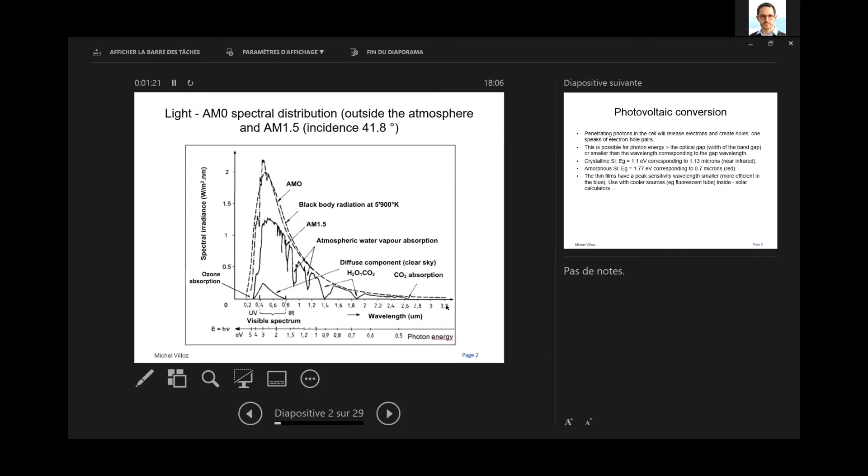The PV conversion is photons that can come inside a material, and we use most of the time silicon. Each photon can, with change, release electrons and create holes. So we speak of electron-hole pairs. That means that the electron will go from the valence band to the conduction band and be available to carry current.

In crystalline silicon, we need an energy higher than 1.1 electron volt, which corresponds to 1.13 microns, so in the close infrared. In amorphous silicon, it is a bit higher, with 1.77 electron volts, which is related to 0.7 microns wavelength, in the red. It's the main reason why we were using amorphous cells to power devices inside rooms, because they have a better efficiency in the blue, and artificial lights most of the time don't have much red part in their spectrum.

If we use silicon, and photons come inside the crystal, they will change the resistivity. If we want to do something active, we have to push them. To push them, we will dope the crystal, adding foreign materials to polarize it and create an electrical field.

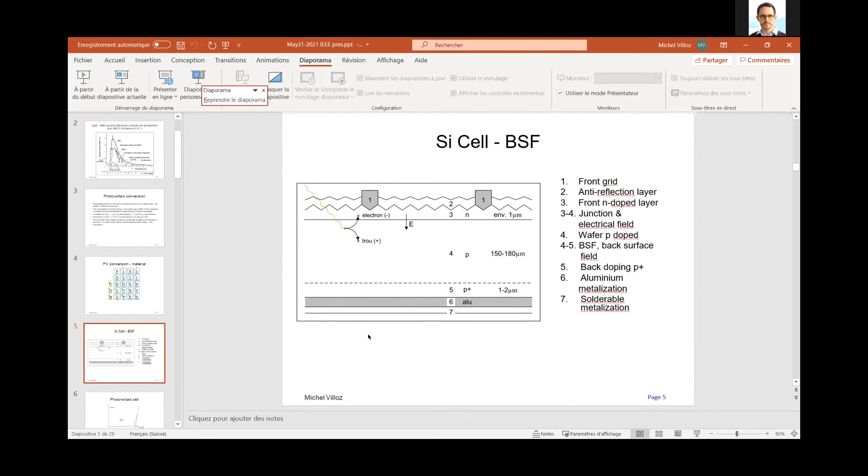A typical module is made of, in this example an old module, 36 cells, enough voltage to charge a 12-volt battery. This has been made for decades. The typical 50-watt module had an efficiency between 12 and 13%.

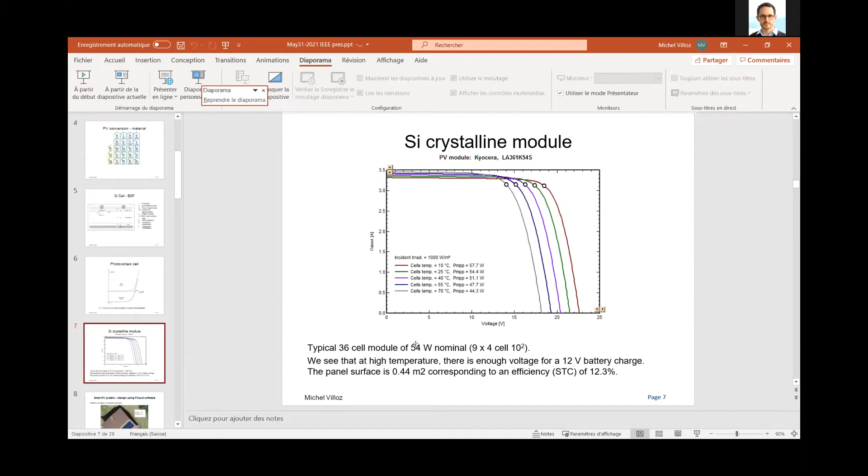If we want to design a system, we will use software to calculate how much energy we could produce. I take a small example in the Swiss Alps, just to show you the importance of the environment. When we have mountains, it's always interesting to see what we can do and how much we lose because of shading from the mountain. So I took an example in Le Sépey, in the Vaudoise Alps.

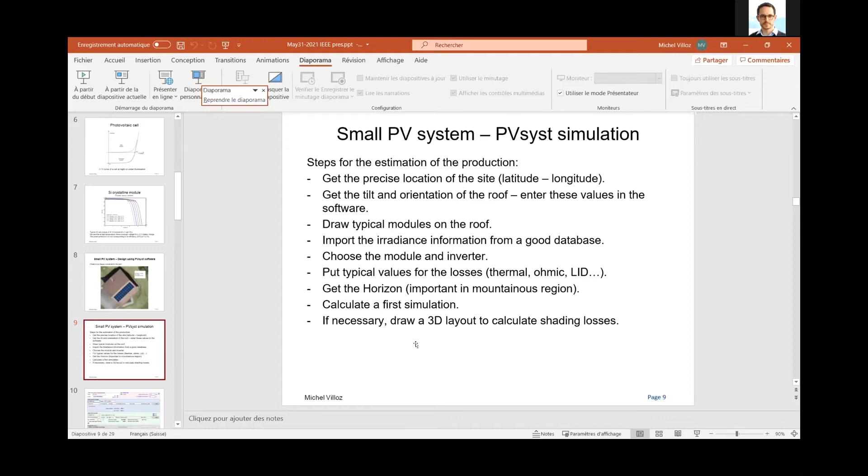If you do a simulation, you have to know the location, then the tilt and orientation of the roof. You will draw how many modules you can put on that roof. You import your irradiance from a good database. You choose a module and an inverter, and you put typical values for losses. Then you get the horizon, especially in Switzerland almost always, and you calculate the simulation. If necessary, you can draw a 3D layout to calculate shading losses and local losses.

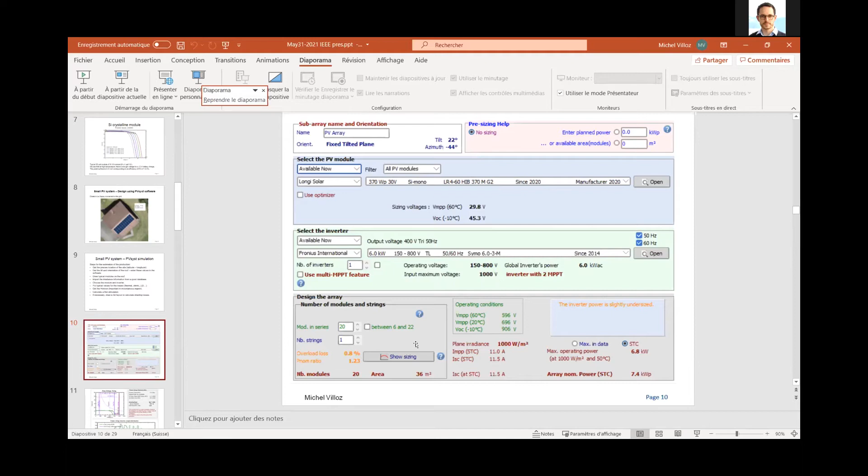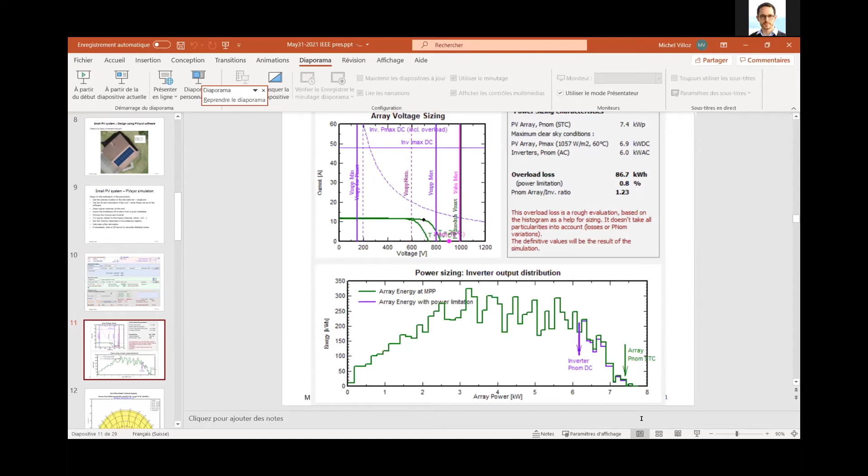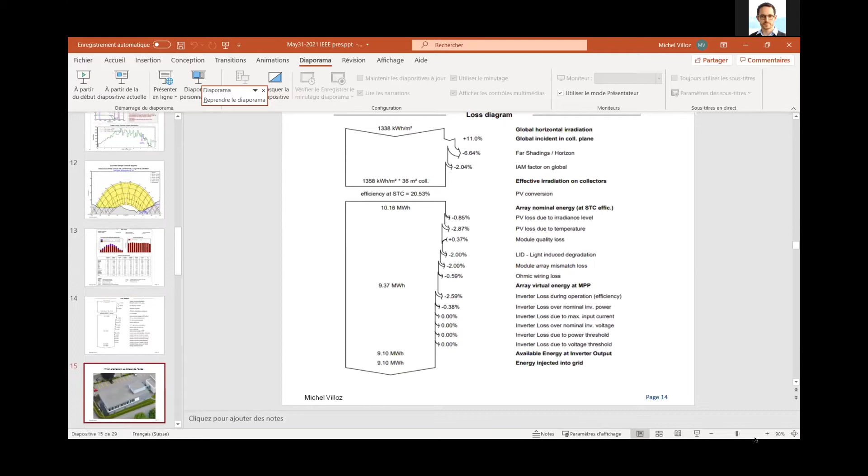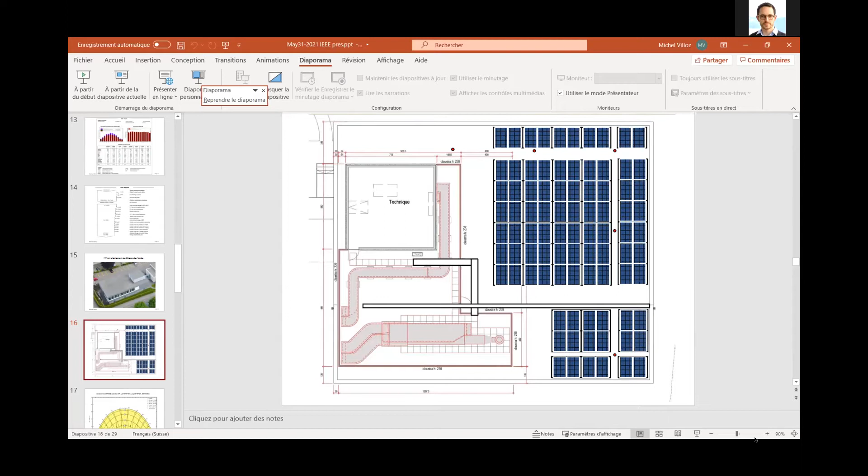It's interesting to put a peak power with cheap modules, especially in Switzerland, where the labor cost is high. It's better to put the maximum number of modules for a certain project.

Here again, I have the horizon. The choice of components: I'm using a module that was available last year, we did this at the end of last year. JA Solar, it's also a big manufacturer from China.

And then ABB, it's an inverter produced in Italy. Since this, they have sold the company to another group called FIMER. So ABB is not anymore the owner of that company.

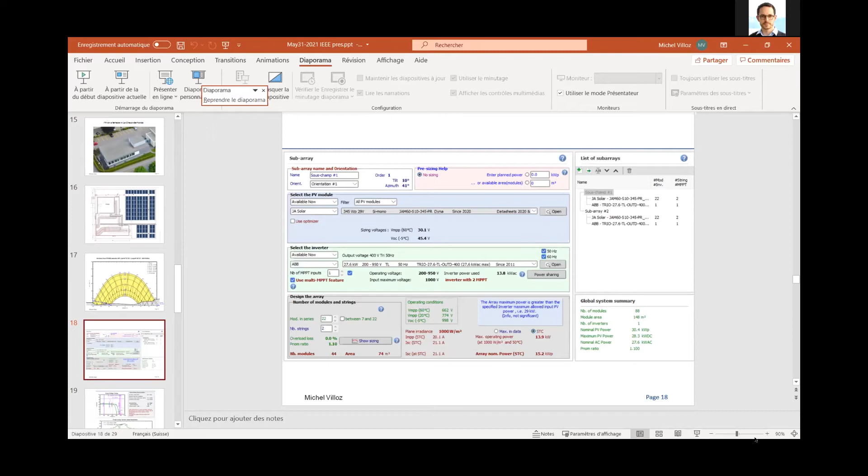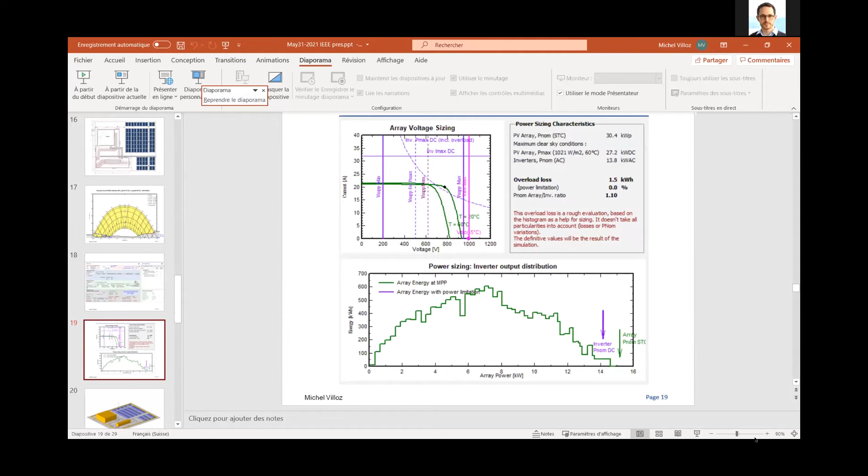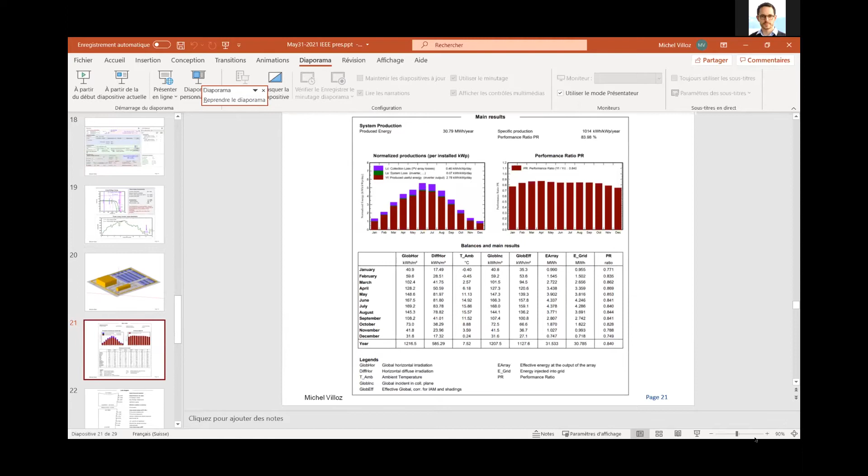Inside the program, we do a 3D design to be able to calculate the shading losses. And when we do the system, again we have all the curves and production, and again the losses.

What is new here is that the first gain coming from the tilt and azimuth is negative, because in the dome we have only 10 degrees of tilt, and we don't have all the modules looking south. Far shading is less of a problem than in the Alps. Then the near shadings are a loss because of obstacles of the building very close to the field.

And IAM again on this module is not so good. Then we have an extra shading loss, which is shading's electrical loss. This comes from the series connection of modules.

So maybe you have heard that on a module you can put optimizers. That means you can change something in the module to have a DC-DC connection just for each module. In that case, we could reduce this electrical loss here. We can win 30-40% easily. But it means you add sophisticated electronic equipment on each module.

If you think we have the temperature between, can be minus, slightly minus. In La Chaux-de-Fonds, we can have -10 for the module in winter, and in summer we can go to 60 degrees. So if you think you can put sophisticated electronics at those temperatures for 30 years without problems, you might choose it, besides the fact that it is expensive.

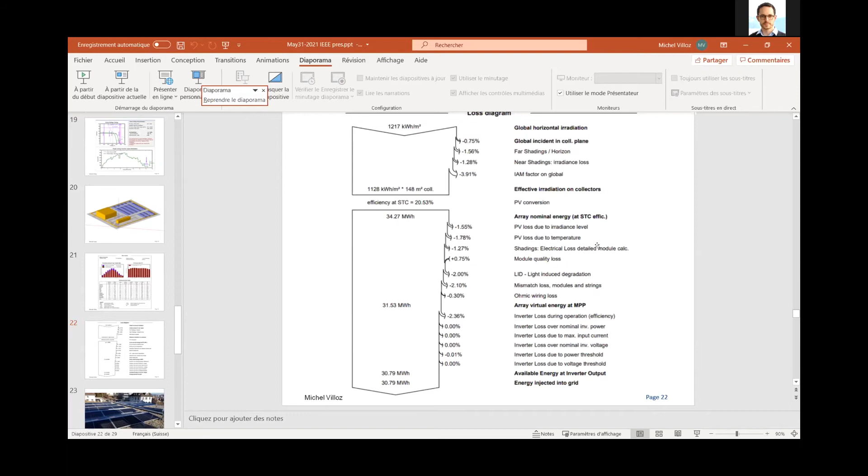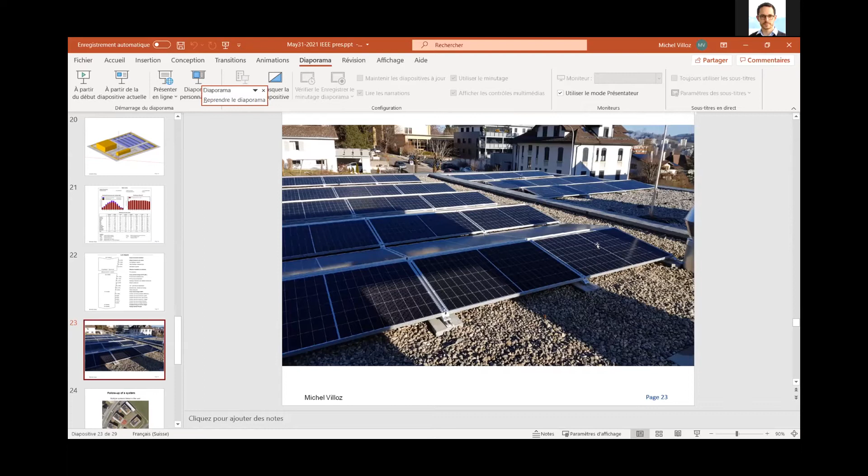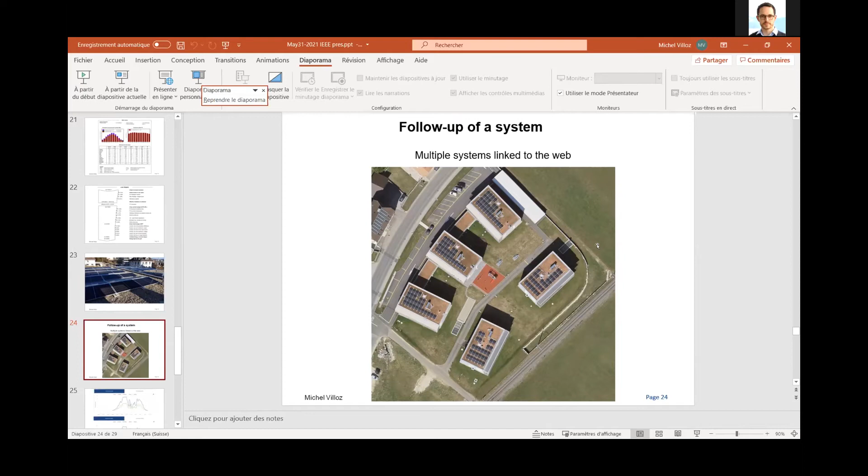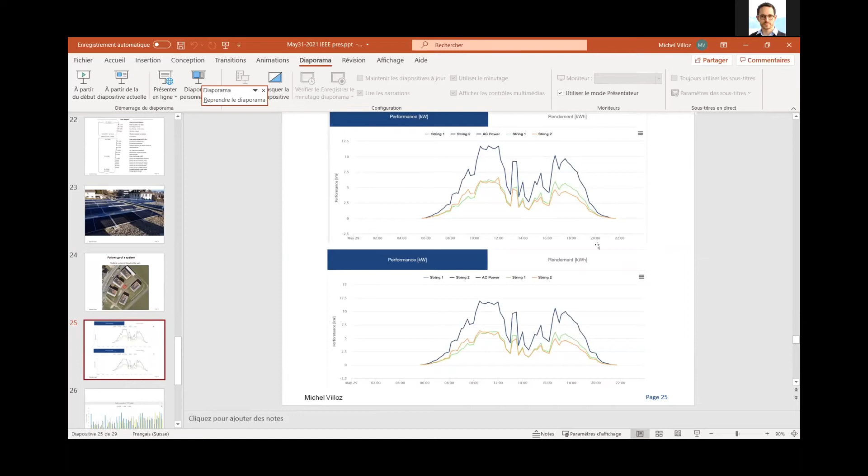And we can also look overall with many years. Here I have an example with 3 years, and we see that at the end of this month we have good results. And the last value, May 30, was fantastic, no clouds at all. So it's a very good day, the best day of May. But in 2019, May was much better in this example.

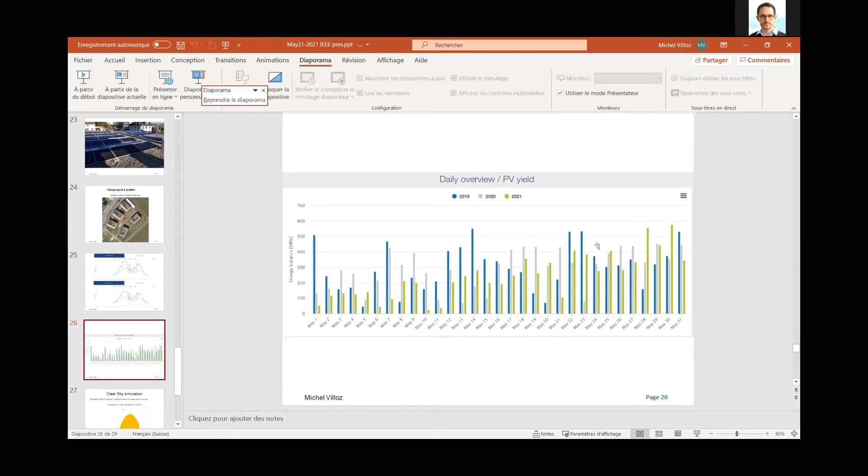What can we do when we have a simulator? We can also, on small systems, we will not put instruments, it's too expensive. So if you have a personal system, you could say, okay, how can I control that my system is not aging? So one way is to do what we call a clear sky simulation. So we decide to make a simulation with days like that. This is yesterday - last Sunday was bright, no clouds, and you get this kind of curve.

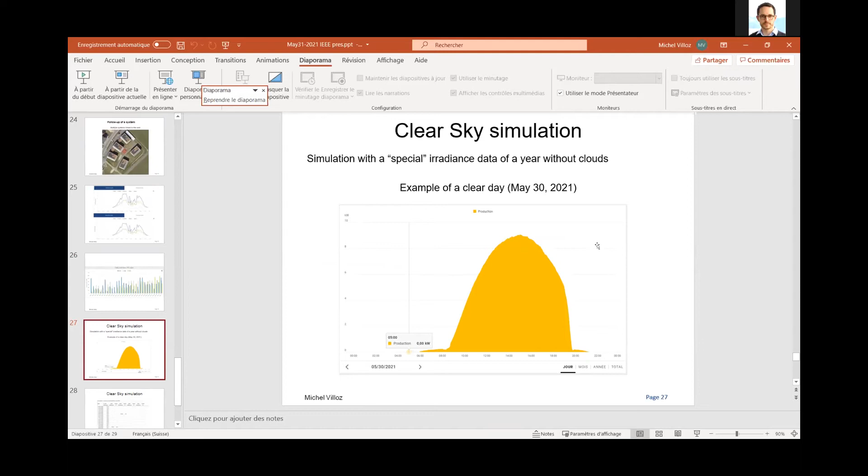It is not exactly symmetrical because my system looks in the direction of west. You see, it's a bit on the angle because of this orientation. So the azimuth is west in this example. And if I do a simulation with this light for the whole year...

I can compare different years in the same month, for example. So here I have an example, 2018, 19, 20, and 21 in May, and I take the best of this period just to see if my system is aging. So in this example, I have 8% difference in 2018, then 8.9, then 9.1, then 8.9. So I can say from this that I don't have any real aging of the system.

I have an example, the same kind of system, but we're not using this. I have a system near Fribourg, which has normal - I have 15 years of production, and the best year was last year.

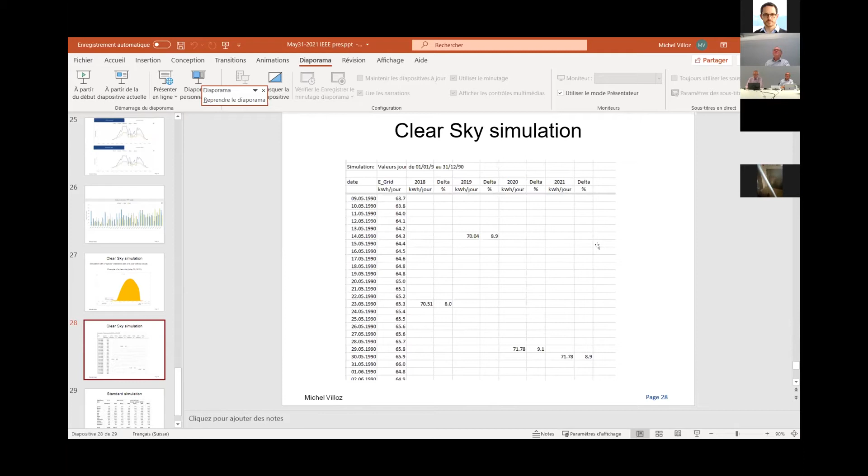2020 was fantastic, and not just in Switzerland, because people were at home. There was more sun last year than in any of the last 15 years. So if we have a normal, standard simulation, I can compare years. I took the same small system here for 2018, 19, 20. But with this, I cannot see if my system is aging because the climate is changing. It's just to see, okay, my system still works. In this particular example, the best year is 2020, but I already knew that.

But I think it's about clear sky conditions. I have used this for expertise, to tell people they should clean their panels, because at a distance, if you have access to daily values, you can produce this kind of analysis.

I had a big system, more than 5,000 modules on a big roof in Valais. They were just asking, should we clean? In 3 years, they had lost 15%. But we didn't know - they had put sensors but never cleaned them. It's a bit of a ridiculous situation. With clear sky data, I was able to see: when the system is brand new, I have a certain value between my simulation and the clear sky reference. Then one year after, and so on. I had roughly 5% loss per year. This was also with modules at a 10 degree tilt. So even in Switzerland, if you don't have a strong tilt, it makes sense to clean.

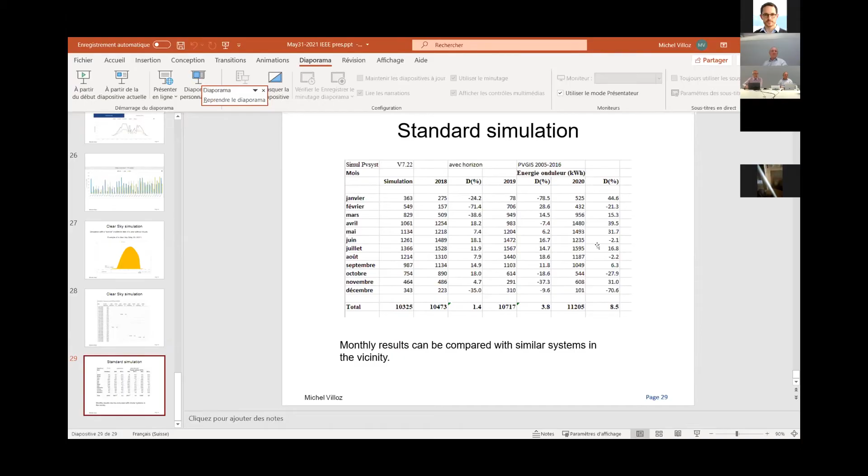Okay, if not, I'll give my connection to Professor Ballif. Okay, you can listen. Okay, fantastic. And you can see my screen as well. Yes, we see you. Okay, perfect, we see you.

So it will be a pleasure in the next half hour to go through a journey. We have seen what a PV power plant is, we have seen some energy analysis of this PV power plant, and now we will really try to take a big journey around what happens in this world of photovoltaics.

As a start, I want to remind you that our goal of using solar energy is twofold. First, we would like to create an energy system that is less costly in the future, and we think it's possible to do that in large part thanks to photovoltaics. Second, at a global level, we would like to mitigate global warming, and the question is whether photovoltaics really has this capacity or not. We're going to check some numbers, including with respect to gray energy.

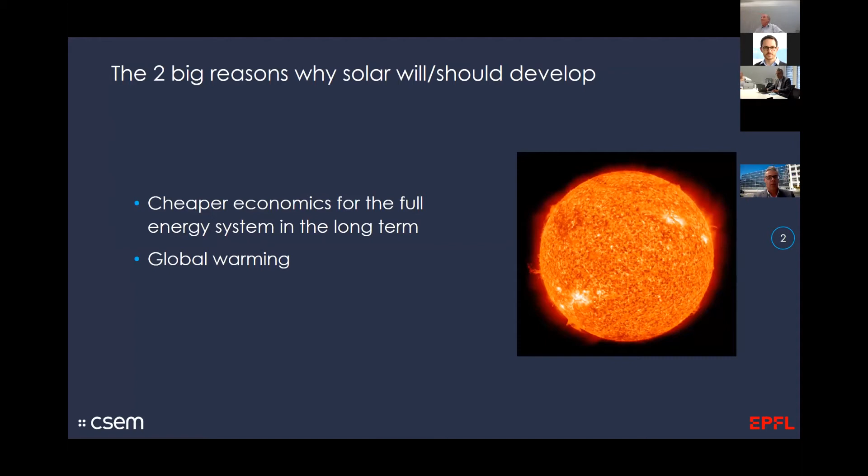First of all, what you need to know is that there's been a huge increase in production capacity, accompanied by a strong decrease in the price of photovoltaic modules. We roughly sell modules according to a unit called the watt, which is the maximum power given under one sun. This watt has come down very much in terms of pricing. At the beginning of the year it was something like 20 to 22 cents per watt. Now it has gone up again a little because there's too much demand for photovoltaics and some shortage in the refinery of polysilicon. But this price will continue to go down in the long term.

So today we're talking about getting a photovoltaic module for something like around 50 Swiss francs per square meter. This module will produce in Switzerland, over its lifetime, around 6,000 kilowatt hours at least. You can quickly make the calculation in your head, and you'll find that just the module cost in Switzerland, even if you import the module, is less than 1 cent per kilowatt hour of electricity.

It is interesting because you can make the same calculation: should I import photovoltaic modules or should I import oil? When you make the calculation, you find that it is a factor 15 more expensive in terms of energy to import oil than to import a photovoltaic module. So the economics is quite quick in terms of import.

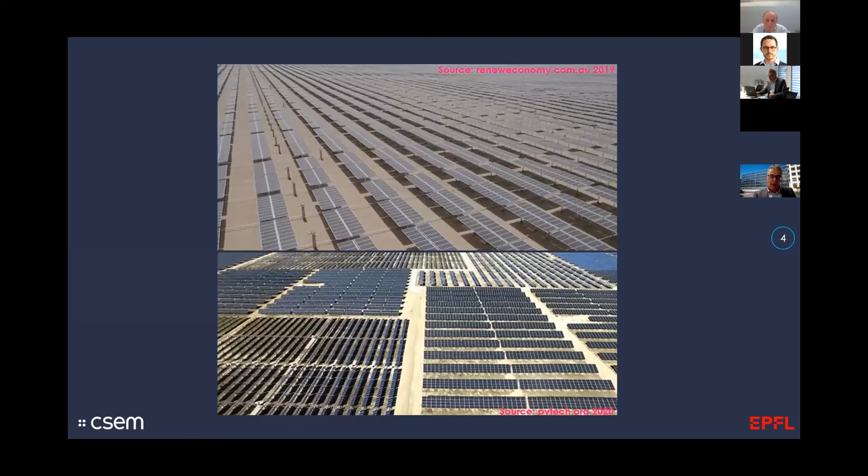If you look at the full system and go to sunny countries, they're starting to build larger and larger power plants. You can see now these very low prices for bids for solar electricity, given in the price range below 2 cents per kilowatt hour, which is quite new because 5 years ago it was not yet the case. It makes photovoltaics really cheap in these sunny countries, and not only cheap, it's a factor 3 cheaper than any other kind of electricity generation - fossil, nuclear, or even a gas power plant. So it has become very cheap, and this opens a lot of perspective.

In Germany, you are at around twice the price, that means more like 4 cents for the large power plant. And in Switzerland, certainly you can also do electricity, depending on the size of your system, between 5 cents and 20 cents if you make a very small rooftop system.

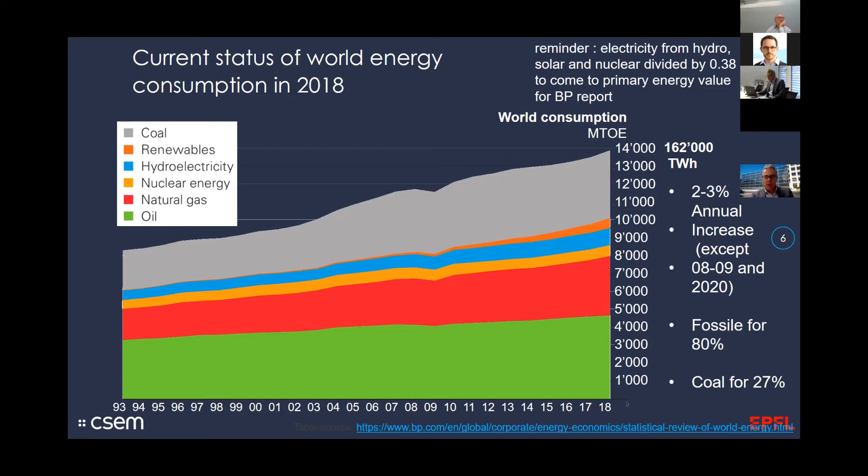If we could use twice less energy because we change our way of living, that would be fantastic. But it's not going to be easy to implement that. And even then, we still need to reduce strongly our fossil fuel energy consumption.

The first question is, technically, would it be possible to really substitute all this fossil fuel? And the answer that you find - I'll give just a few answers here - is that yes, it is possible. You need to consider some large systems to do that. For instance, you can have a look at the study of the group of Breyer, who is replacing in Europe all the electricity from coal and gas and even nuclear with wind and photovoltaics and a small part of biomass.

And this is in a scenario where there is a moderate growth of electricity demand, so it's not yet the full scenario. And they find, very interestingly, that it is possible to balance every hour of the year between solar and wind at the European level.

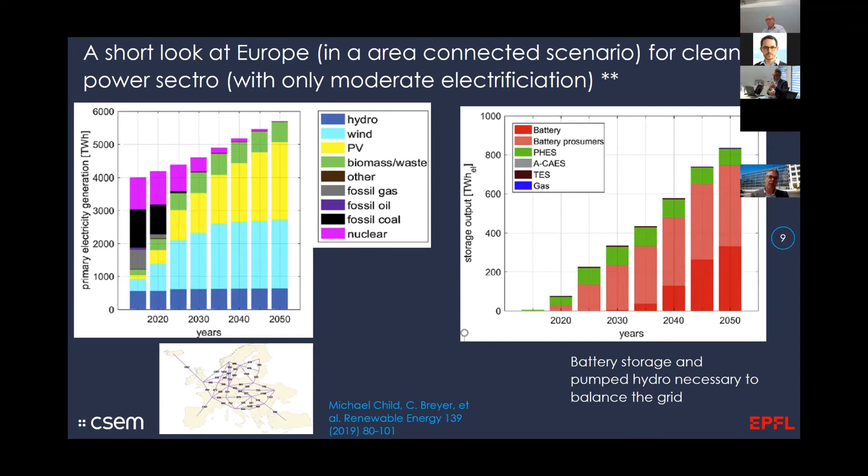They also find that you need either to re-enhance some connections between parts of Europe, or that you need to use a little more storage. But storage here, you don't even need long-term storage, you need mostly short-term storage. This short-term storage will come either from hydro, we already have a big part of it, or it will come from batteries. This can be either prosumers, people who have a battery at home, or it can be the battery of cars, because in all this scenario, most of the cars go from combustion motors to electric, and most of the heating systems go also towards heat pump solutions.

And you can do the same scenario at the world level, and you find two things. First of all, you find that typically you will need to put quite a lot of solar and wind, typically 30 or 40 terawatt, 40,000 gigawatt. So it's quite a lot of solar panels.

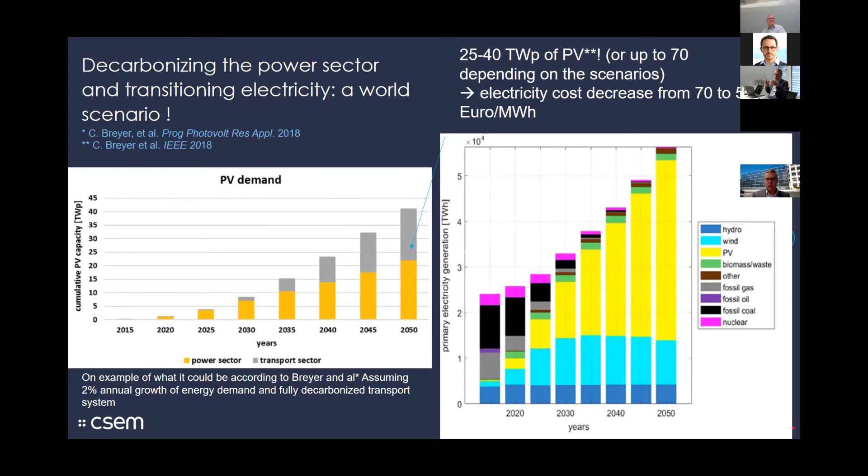But the second thing, even when you make this scenario, is that you find that your electricity, for instance in Europe, would be cheaper than what we have now. So it will be cheaper, it is doable, but of course these are not the same people who are winning and losing. And the question would be, of course, is it also cleaner?

You would need ideally to have also wind in Switzerland. It's good for the winter time. If we have not enough wind, we'll have a deficit more in winter, which we can either compensate by having a few gas power plants, or by importing hydrogen, or by importing electricity. But even in the worst case, we would still be able to decrease our CO2 emissions by up to 86% while still keeping gas for 1 month or 2 months in wintertime.

So anyway, the orders of magnitude are the same everywhere. In the case of Switzerland, it would be between 35 and 50 gigawatt of photovoltaics which we need to install. Today, we have only around 3 gigawatt. So we still need to multiply by a factor, let's say 15, what we have installed in PV in Switzerland.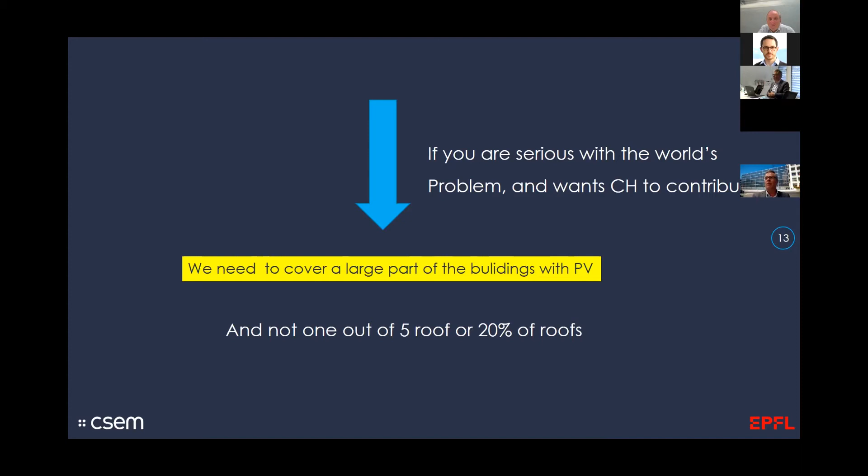But if you are serious in a general way, there are not so many other options than developing massively this renewable energy. And in the case of Switzerland, we should also cover a large fraction of our roofs. People who install a small fraction of the roof are wrong. This is an unsocial and unecological act. You should put as much PV. We need to put as much PV if we want to keep coal and gas out. And I come back to that point.

But you have understood we need a lot of solar. What does it mean practically? It means that we should still increase by a factor of 8 to 10 the annual module production, going towards, say, 1 terawatt or 1.5 terawatt annually. We are around 160 gigawatt for this year. Of course, most of the scenarios you read from many agencies are always wrong and they don't capture the dynamic that could be possible here.

And it's interesting to just evaluate: if I wanted to install enough production capacity to refine silicon, to make the solar cell, to make the solar modules, how much would I need to invest? Well, it's quite easy. You can calculate based on the cost of each equipment from ingot to modules, and you find that you should invest around $18 billion per year over 10 years. You invest that, and that it's nothing.

It's nothing - 18 billion, I can give you a lot of examples. It's $180 billion, and with that you would have all the manufacturing capacity for the PV modules you need worldwide, including refining all the raw materials. So it's not a problem. This is what I call peanuts. Of course, you just need to have the will to do that.

But it also means one thing, and it's very good because I'm working in the field of innovation in solar: there is still a lot of room for developing new things. We need better photovoltaics. We want to improve every aspect of it because it makes the energy transition easier. And of course, we have this technology evolution.

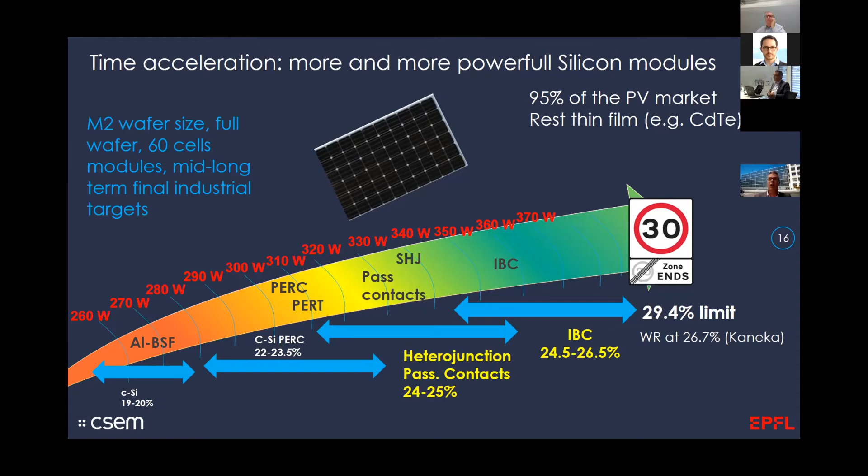The first point is to really analyze this curve, which is the average module efficiency that you can buy on the market - not the best, but the average module efficiency. So the market, to be clear, is 95% crystalline silicon, about 5% is maybe cadmium telluride, and 0.1% are other technologies, but it's mostly crystalline silicon.

What you can see is that there is every year an average improvement of the module of around 0.4%. This means that if you develop something and want to enter the big market in 2025, you should have modules with at least 21 to 22% average efficiency. Otherwise, don't think of entering a mass market. For 2035, this will be 24 to 26%.

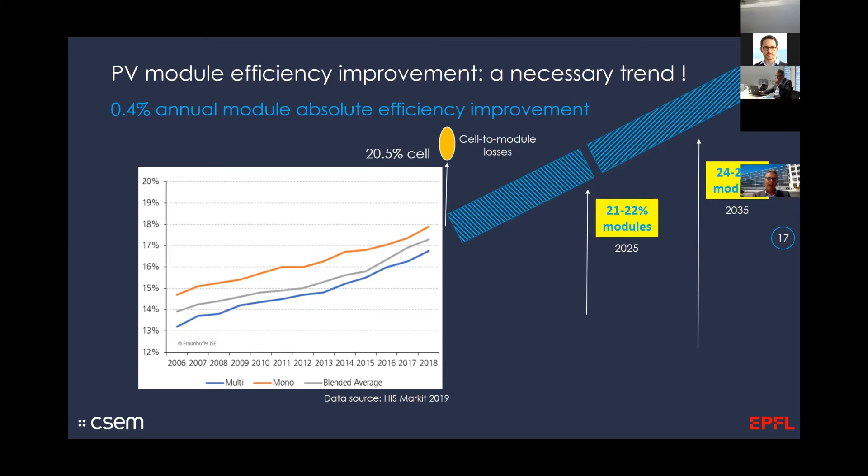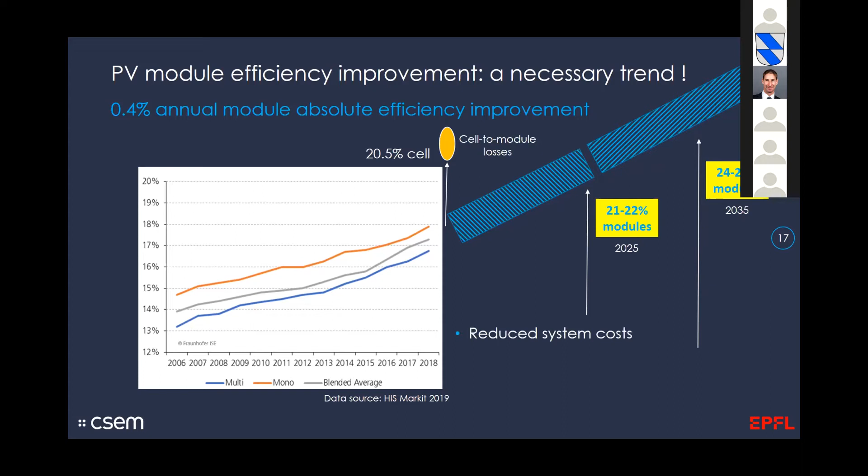What is making this improvement possible? There are two things. One is the continuous improvement of each technology, and the second is massive industrialization. The higher the volume, the more you're able to decrease the cost and improve the technology step by step. And sometimes you have technological changes.

You don't need to remember all these pictures, but this gives you a nice overview of many of the kinds of solar cells on the market - such as the old solar cell, the first one you see on top here, and this new one which is now taking more and more space on the market, called the PERC solar cell.

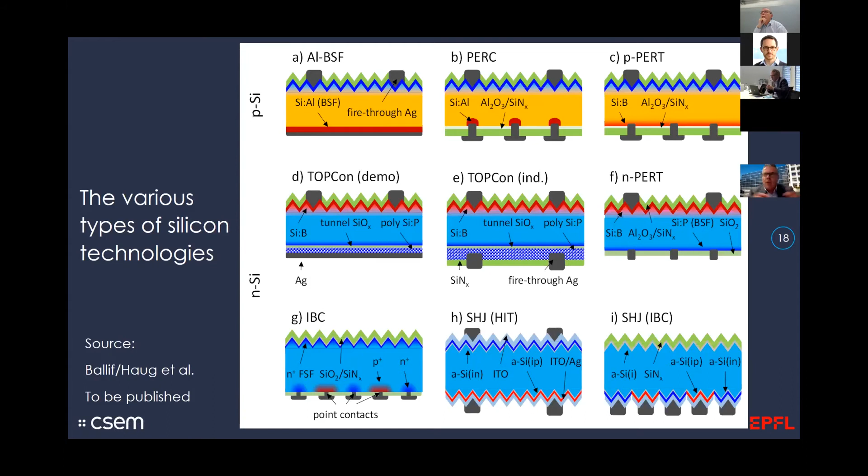And soon you will see more and more TOPCon solar cells, more heterojunction, and sometimes back-contacted solar cells. This technology, such as the aluminum BSF, was here for 10, 15, 20 years, but suddenly the PERC solar cell rushed to enter the market.

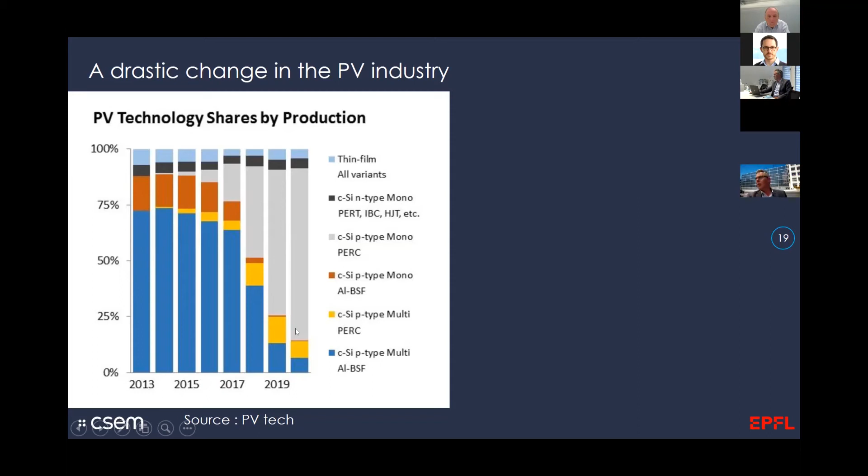In 3 years, the full market has shifted from this blue part, which was mostly multicrystalline or large-grain silicon made with this aluminum back surface field solar cell, to monocrystalline silicon made with PERC technology. It flips very quickly, with some space now available for new kinds of solar cells such as TOPCon, heterojunction, and others that I will shortly describe.

In Neuchâtel, one of the things we've worked very hard on, based on expertise developed in the field of thin-film silicon and started well before I arrived by Professor Arvind Shah, who will speak after me, we've taken the process used for thin-film silicon to deposit, on top of crystalline silicon wafers, a very thin layer of amorphous silicon. This gives you at the same time a fantastic surface passivation with no more recombination of carriers, and, if you add a dopant on both sides, it collects the carriers without any metal touching the silicon.

This kind of solar cell has much higher voltage than other solar cells - 740 millivolts - which means it has a better temperature coefficient, and consequently provides even more energy per watt peak.

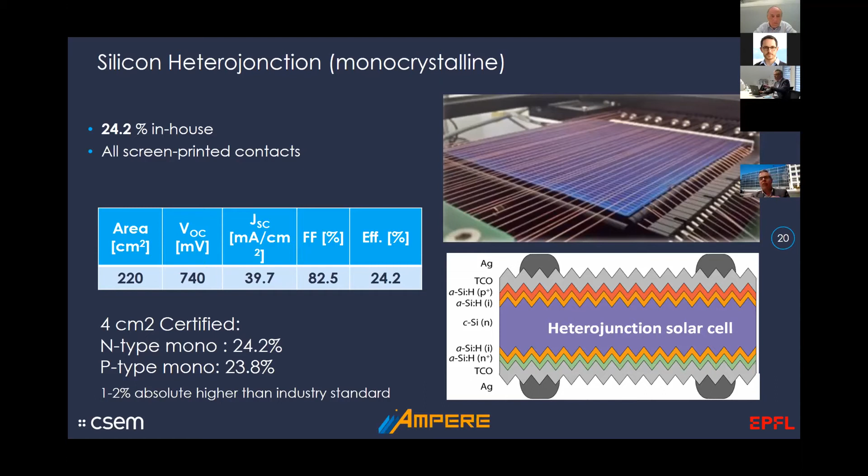At EPFL and CSEM, we can make large solar cells reaching 24.2 up to 24.7%, which is better than the PERC solar cell. Some industry players, who can run many more samples than we can, reach close to 25% in R&D mode and over 24% in production. So heterojunction is one of the technologies we developed, and it has now been marketed and industrialized in many countries in Europe.

We work with the Swiss group Meyer Burger, which installed production lines in Russia, at Enel in Italy, at REC in Singapore. But it was difficult to sell to Chinese companies that wanted only specific sets of equipment. Meyer Burger decided not to sell production lines but to become a module manufacturer. So one year ago, they changed strategy, and now they've just inaugurated new production lines in Germany that should make modules reach close to, but not exactly, 22%, hopefully soon.

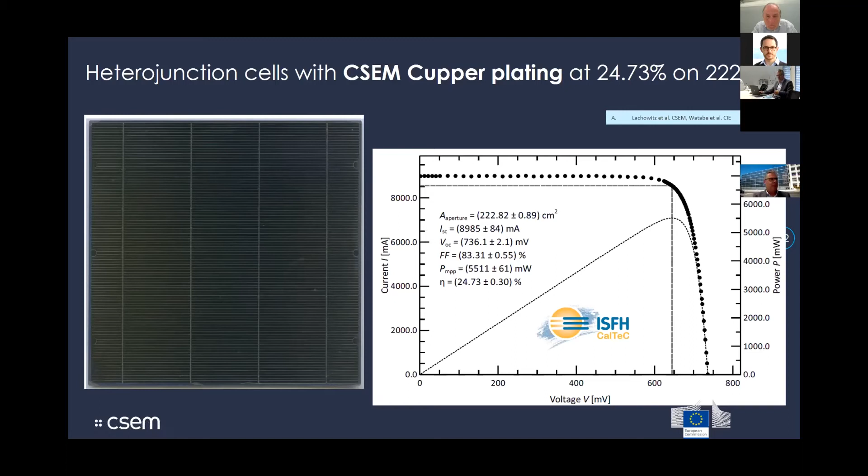And here you can see we could make a large solar cell with close to 24.7%. If you want to go further with silicon, you can do so.

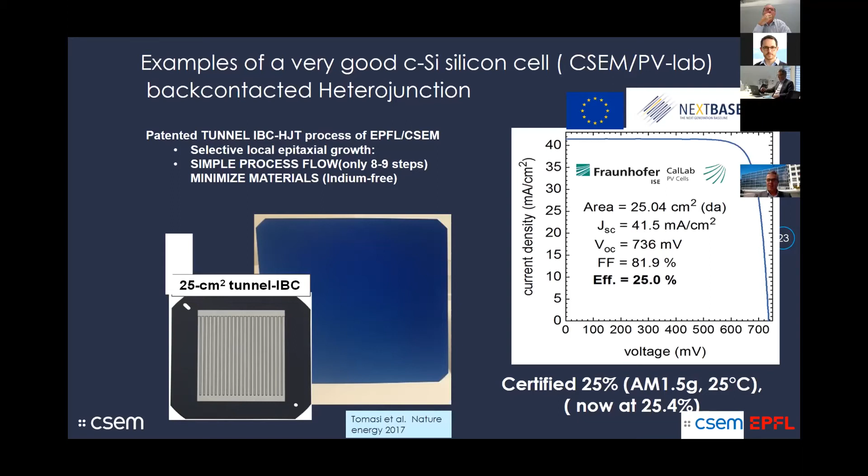One of the things we have patented, but also published in Nature Energy, was a special heterojunction solar cell where all the contacts are at the back. We've certified more than 25% here. I think some industrial partners have certified 25.4%. We also reached similar results in the lab. So, very promising technology based on heterojunction, but I cannot say anything more about that. You'll find out hopefully in a couple of years why.

So now you all ask yourself, fantastic, but is it really sustainable to work with photovoltaics? Of course, I hear a lot of things about all the bad things, such as you cannot make solar panels without destroying the environment. There are a few points to pay attention to.

First of all, of course, you need some raw material. You need sand, but we have so much sand, and it's certainly not photovoltaics which will destroy the sand reserves. We need some rare materials such as silver, and in some cases indium, but we can substitute them with other materials—there's no problem. Silver could be substituted with copper, and there's still quite a lot of silver. Of course, all the mining, as for every field, should apply good practice—this is not specific to photovoltaics—but there is relatively little issue with that in photovoltaics.

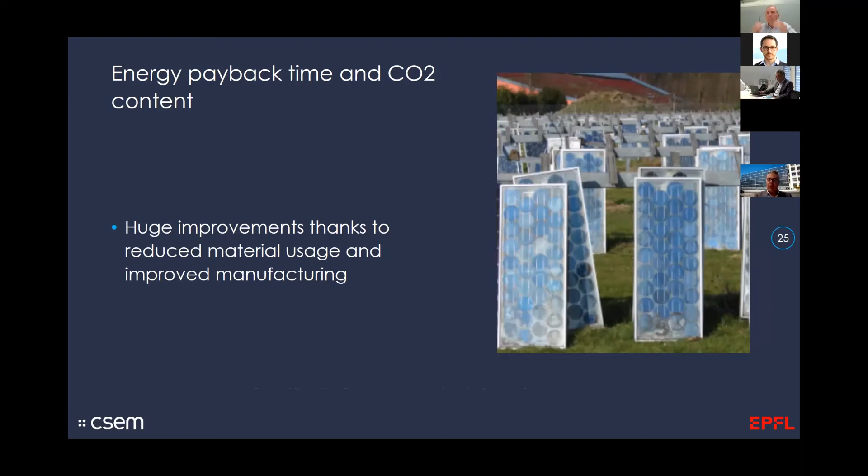Now, one issue is about the embedded energy, the CO2 content. If you look at the old modules, of course, it used quite a lot of silicon, and purifying the silicon was an energy-intensive process. But things have strongly evolved.

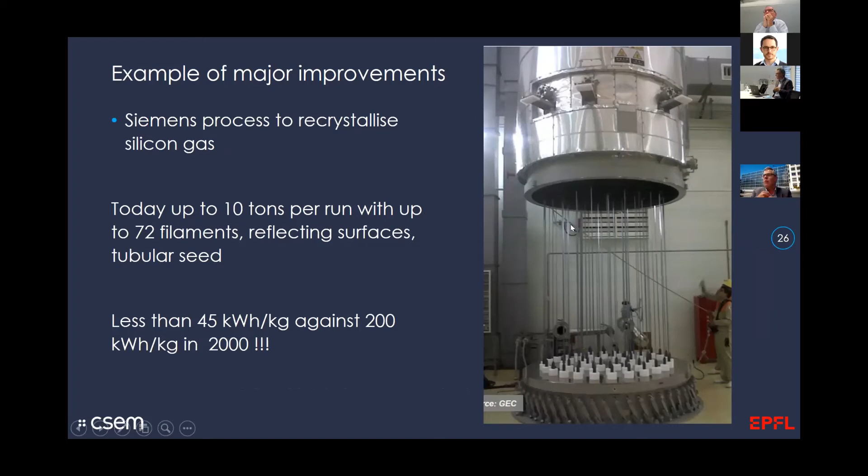For instance, if you look at this reactor here, it's called a Siemens reactor, where you inject a cleaned gas of silicon trichlorosilane, and it recrystallizes along filaments. This is very energy intensive, but it's a way to get really pure silicon in the form of chunks. In this process, you grow silicon and end up with these rods of silicon. It used to take more than 200 kilowatt-hours per kilo to make one kilo of silicon.

But thanks to improvements—a much higher number of filaments, longer filaments, even tubular filaments, and reflected walls for these huge containers—they can now make up to 10 tons of silicon at a time, and they've reduced energy consumption down to 45 kilowatt-hours per kilo, which is a fantastic improvement. So this is one innovation.

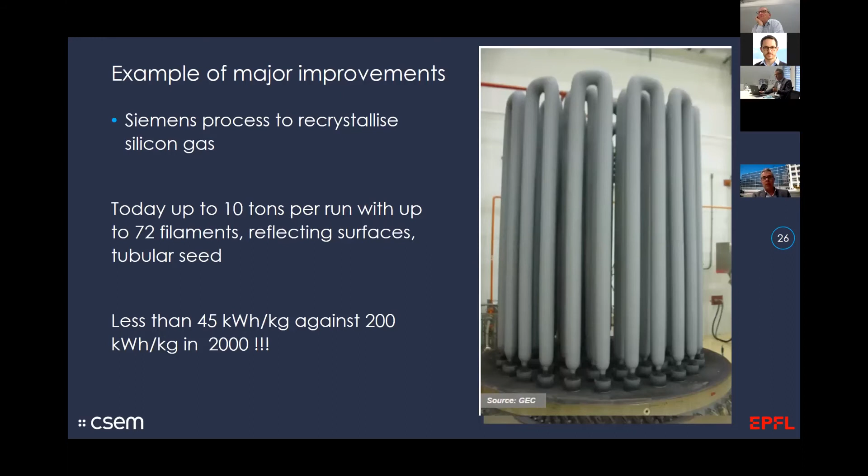Another innovation in which many Swiss companies played a decisive role was the introduction of not only cutting silicon with multi-wire, but also the transition from cutting with wire and silicon carbide particles to using a wire coated with small diamonds.

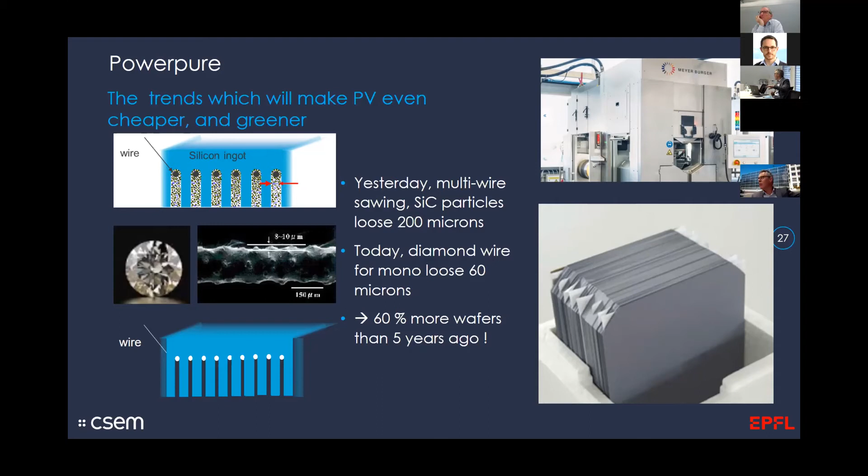Thanks to that, with these wires you can cut 6,000 wafers at the same time. And with diamond coated wires, people have been able to reduce the losses of material from around 200 micrometers down to 60 micrometers. That means by transitioning to diamond wire cutting, you suddenly get 60 or 70% more wafers.

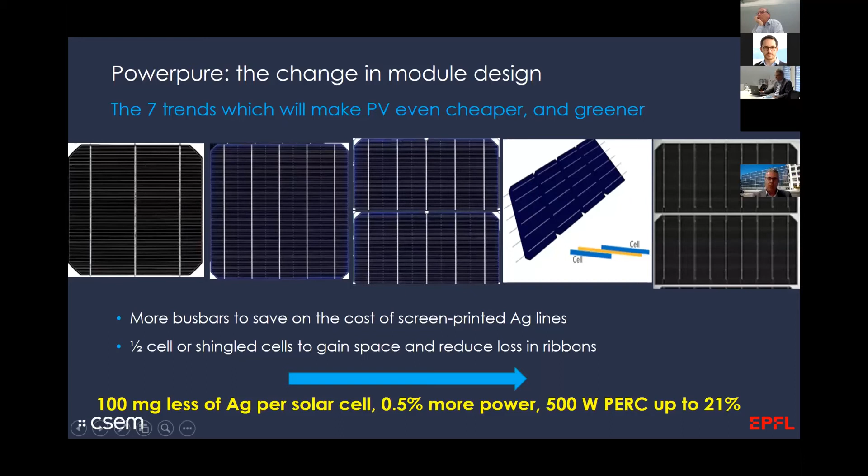So less energy for your silicon, and you get many more wafers per kilo of silicon. Then you have other kinds of innovations, such as increasing the number of bus bars at the front of the solar cell. This allows you to save on silver cost, and allows you to gain some efficiency in the module.

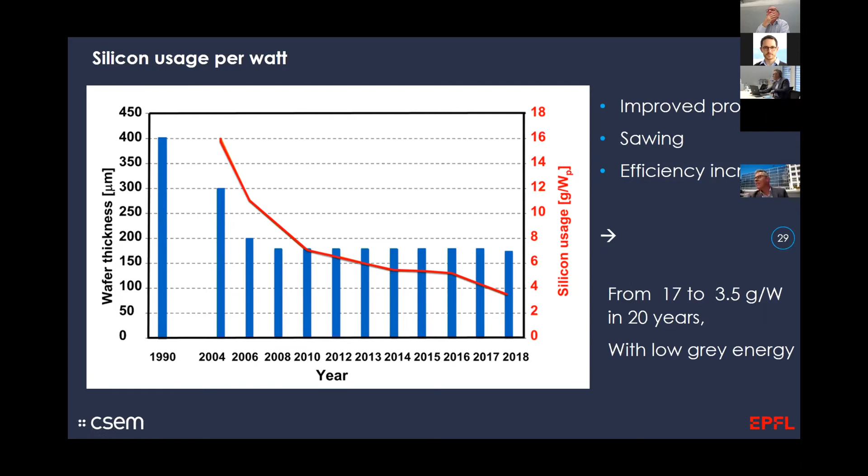If you put all that together, improved processes, improved efficiency, improved sawing, you see that we went from around 17 grams of silicon per watt down to 3.5 grams per watt, with much less energy per gram per watt. And if you look at that for every part of the process chain, in the end you find that to make a modern crystalline silicon module, you need something like 0.5 to 0.8 kilowatt-hour per watt of module.

And your 1 watt will give you in Switzerland 30 kilowatt-hours over the lifetime. So you put in 0.5 kilowatt-hour and you get at the end 30. So it's roughly, let's say, half a year at the module level to recover your energy. This is the energy payback time.

Now if you look at the CO2 content, you need to know which kind of electricity you used to make your module, whether it's Swiss clean electricity or carbonized Chinese electricity. Of course, here the value will change a lot.

But you can also calculate that, depending on the sources of your electricity, you are per kilowatt hour of solar electricity produced at an equivalent CO2 at the module level between 7 and 30 grams. 7 would be the best case of everything made in Europe, and 30 is the worst case of everything made with coal in China. This 30 grams has to be compared to 400 grams for a gas power plant, or 1 kilo for a coal power plant.

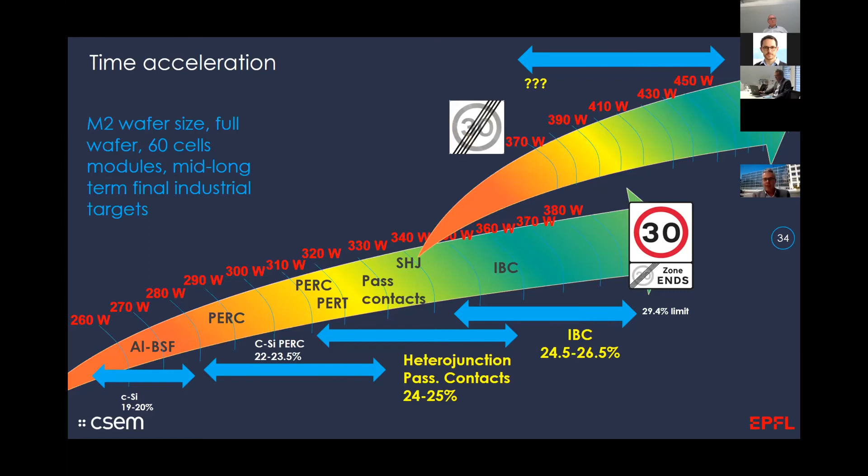But the very big thing now is the new material called perovskite. Perovskite is a crystal structure, but some people found that certain specific crystal structures based on organic, inorganic compounds are actually quasi-ideal semiconductors. And with this you can start to make really fancy solar cells.

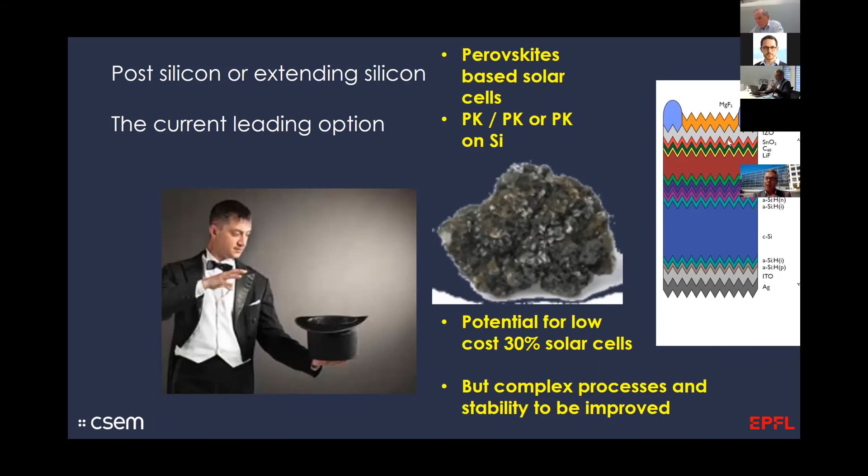The process is still a little complex. The stability is not yet at the level it should be for a product that should last 30 years, but there are good improvements. At least in the lab we now have some quite interesting results where we demonstrated efficiencies over 28% with these small solar cells based on perovskite silicon, and I'm convinced that within one year or less we'll reach the 30% mark for laboratory samples, not yet for products.

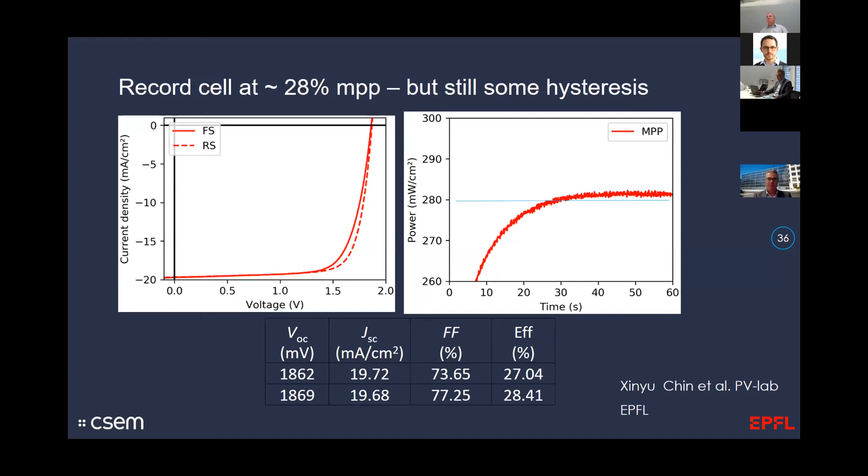So now in the last 5 minutes, I'll just show you a few more things you can do with photovoltaics. I've spoken mostly about technology and solar modules, but you can do so many things with solar that you can go beyond simply the cheapest - sometimes you can do the nicest or the most useful.

So this is one application. And here the team at CSEM, which emerged from PV Lab quite a long time ago, is really ensuring there's pilot production, or even full production, of such devices.

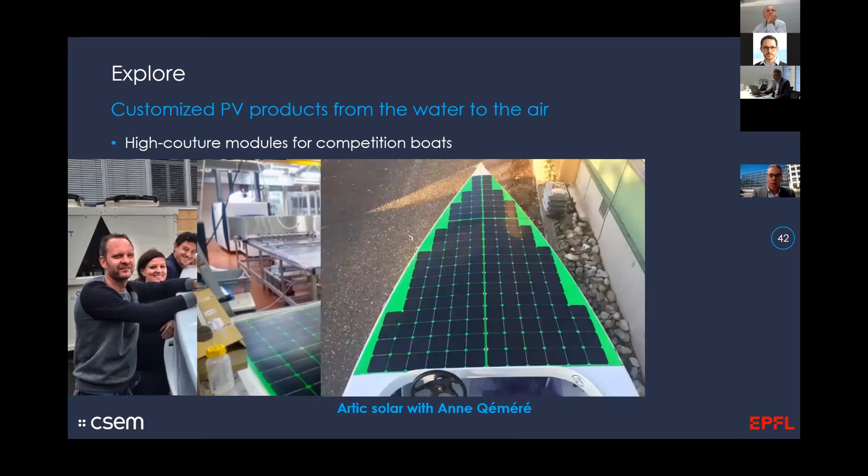Then you can use low-cost solar cells to make special products. We've pushed quite far the development of special packaging solutions. In Neuchâtel we can formulate polymers, we can extrude polymers to make all kinds of very special laminates, and we use these laminates for a lot of applications. Of course there's the solar boat of Raphaël Domjan, but then we went for many more specific solutions - boats that need to go into Arctic regions or very hot regions. These are solar panels with very high efficiency, with special polymers on which we can jump or walk.

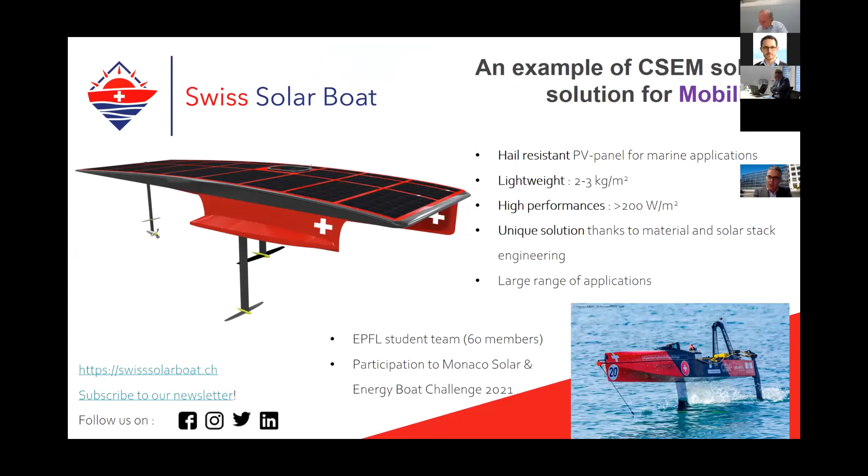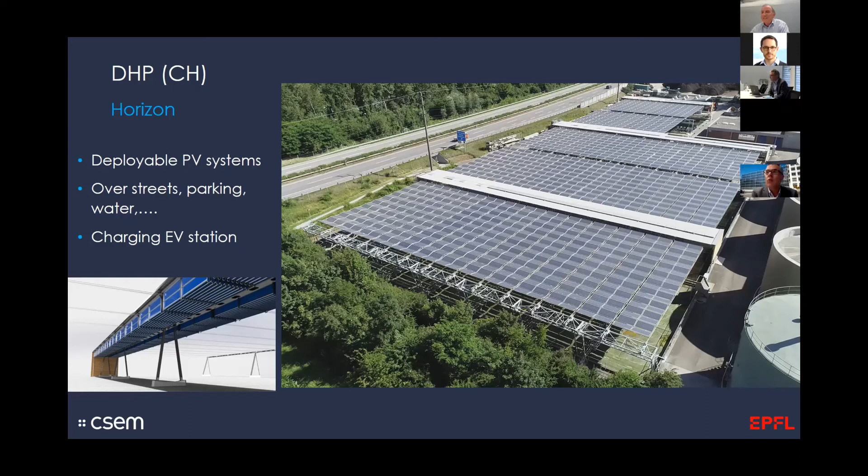You can do many more things. This is a fantastic product from the company DHP in Switzerland. These are systems you can unfold on top of, for instance, a sewage station, parking lot, or tennis court. So you can also use spaces that are not only on buildings. A lot of possibilities for deploying photovoltaics.

But of course, one thing I like quite a lot is that we are in Switzerland, a beautiful country, and people are very sensitive to aesthetics. People don't like it looking obvious like that. People prefer to have it discreet. This explains why we have a lot of companies in Switzerland trying to develop nicer, special photovoltaic products, where you don't pay the least, but it needs to be nice.

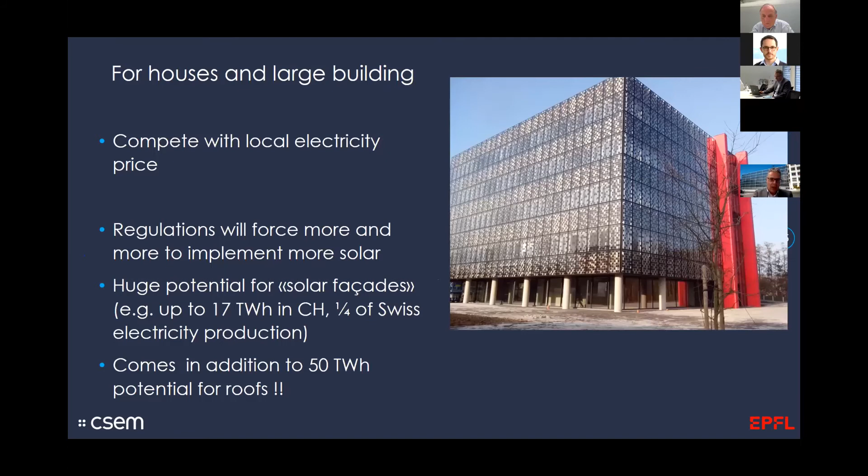In Europe, you also have quite a lot of companies, and we are involved in many developments with the EPFL PV Lab and the CSEM PV Center. There is also good potential on the roofs, even on facades. In Switzerland, you could produce around a quarter of today's electricity demand with solar facades, which produce well in both winter and summertime. Fantastic possibilities.

Of course, you have a fight between the architects, who want to make fantastic, beautiful projects that are sometimes really too expensive and too unique, and the engineers who want to see photovoltaics everywhere. I'm having a lot of arguments with architects and engineers to try to find the best way to put more photovoltaics everywhere into the building. But certainly what has come up in recent years is something that will help develop this market.

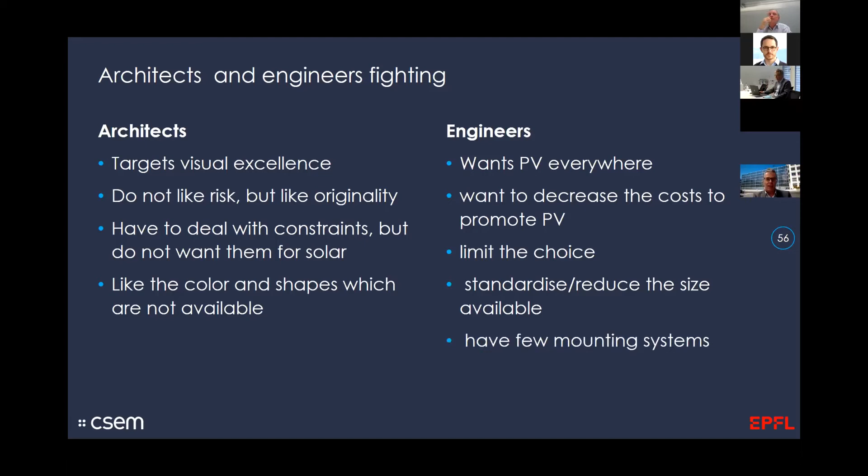You have first this simple roof integration from companies such as 3S Solar Plus, which make a beautiful mega-slate system. You also have a nice solution from Schweizer and from Eternit, but the one from 3S is manufactured in Thun, on production lines, really making thousands of square meters of solar modules every day.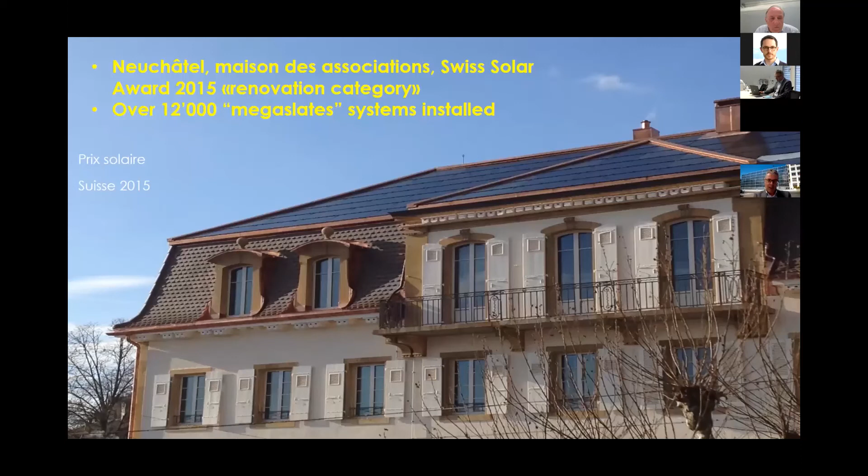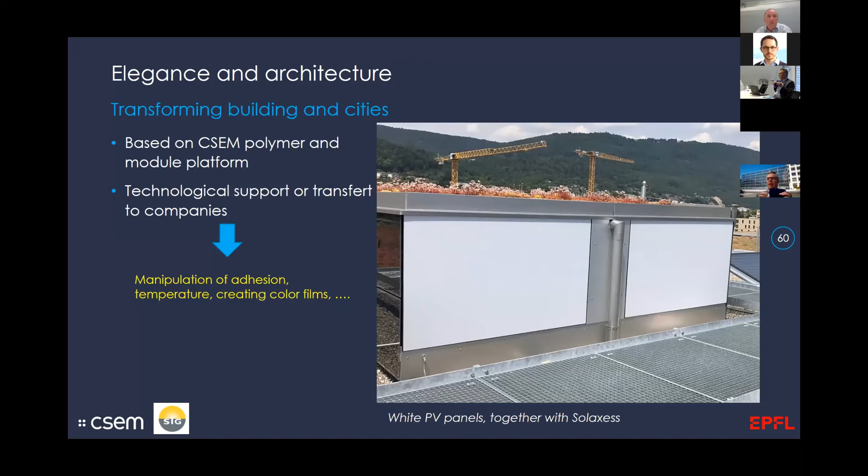What has changed in recent years is that based on the demands of architects, we thought about how we could make things completely different. We came up with what we call transformative photovoltaic technologies. Crystalline silicon is becoming so cheap that we could actually sacrifice part of the light, reflect it, use the infrared, and give it a fantastic visual appearance. We could really develop the first white photovoltaic modules.

So I tried to get some support from US President Trump when I was there on my last trip. He didn't like my proposal.

So then I came back and we worked very hard with a startup from CSEM called Solaxess. We've now made quite a few projects and we have a technology available for making white photovoltaic modules at quite low cost. You can see that here, and this is one of the first fully white houses.

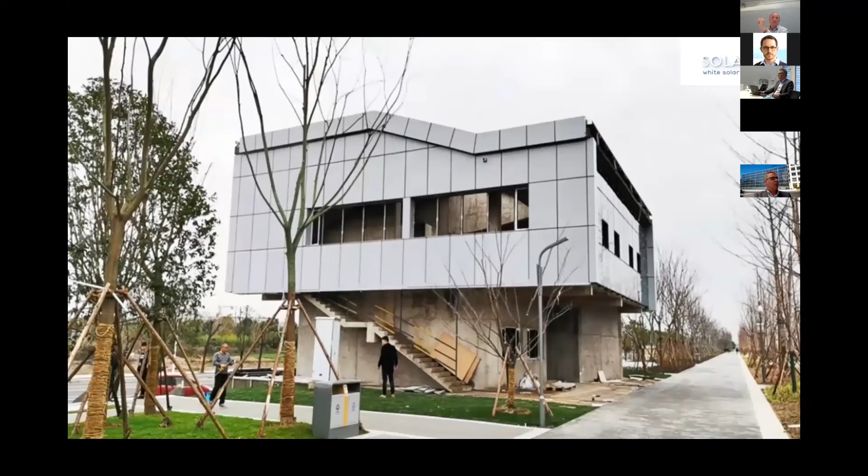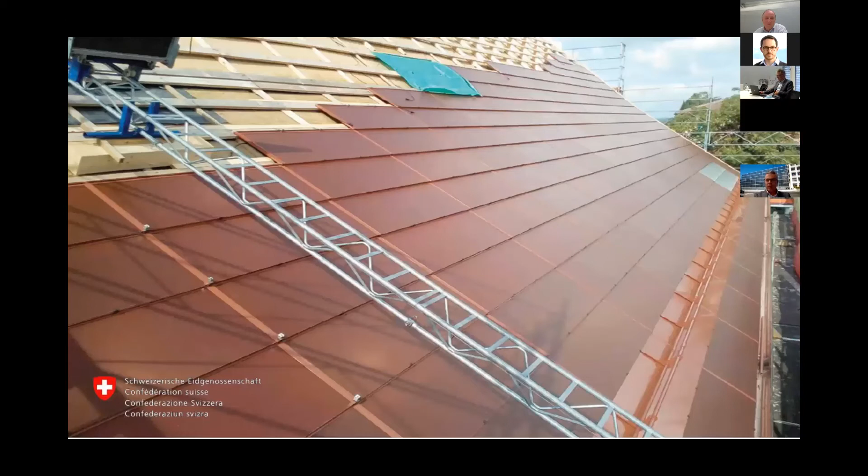So this is the first thing. If you can do white, you can do a lot of other things. We also made this project with a different technology in Switzerland, on an old farmhouse. It was the first terracotta roof, and these are all crystalline silicon modules. You can see this beautiful renovation.

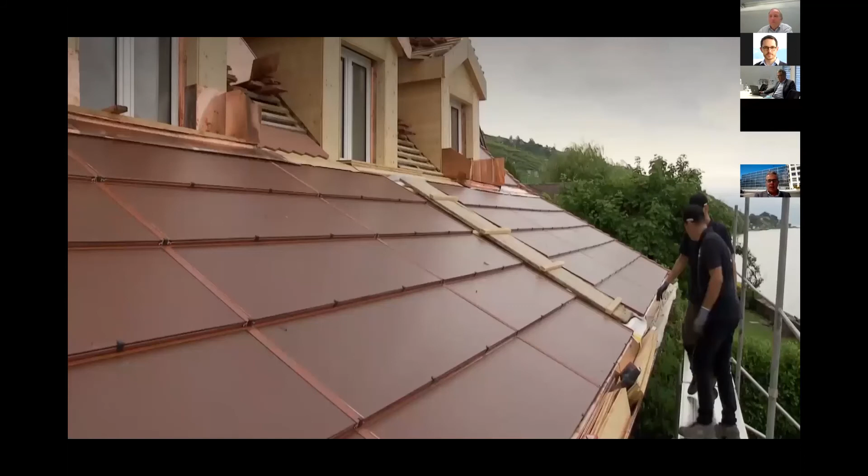This shows that there is actually no limitation in what you can do. This project has had a lot of small brothers. You can see private people equipping their house, the wine caves in Neuchâtel, the Moulin Bayrel, and a more recent example using Solaxess technology, an old post office in Zurich, fully covered with this beautiful terracotta.

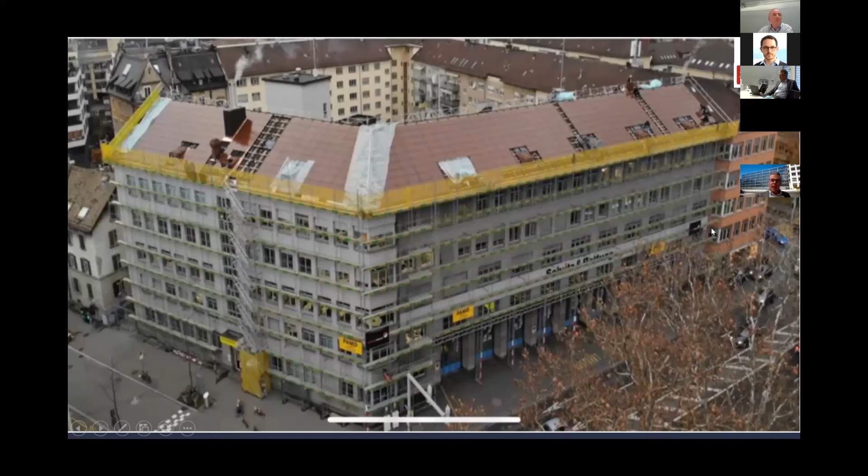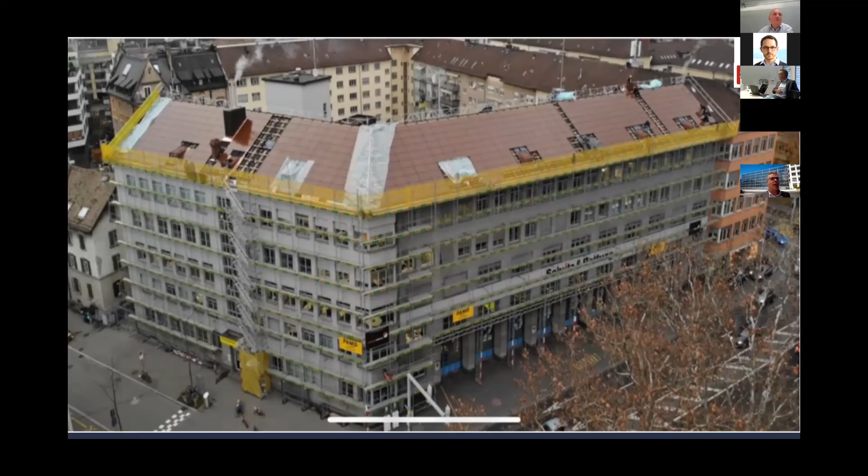I like this kind of project. I think it's really fantastic for the city, but I can also tell you that some heritage organizations in Zurich have attacked this building because they think you shouldn't change the roof of the buildings. So it's not going to be easy to make the transition. I wonder how people want to do that. But basically, the technologies are available, and if you can do all that, you can do it either larger or smaller.

You can see here a beautiful roof, which contains a lot of small modules, all interconnected with, in addition, small inverters or power optimizers. And here you have solar on the four roofs, or the full roofs, and even on the edges. So this is a very special, haute couture photovoltaic project.

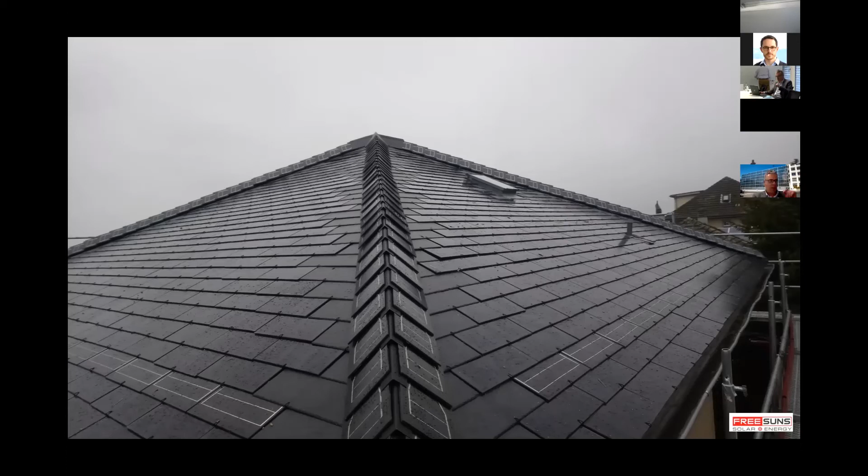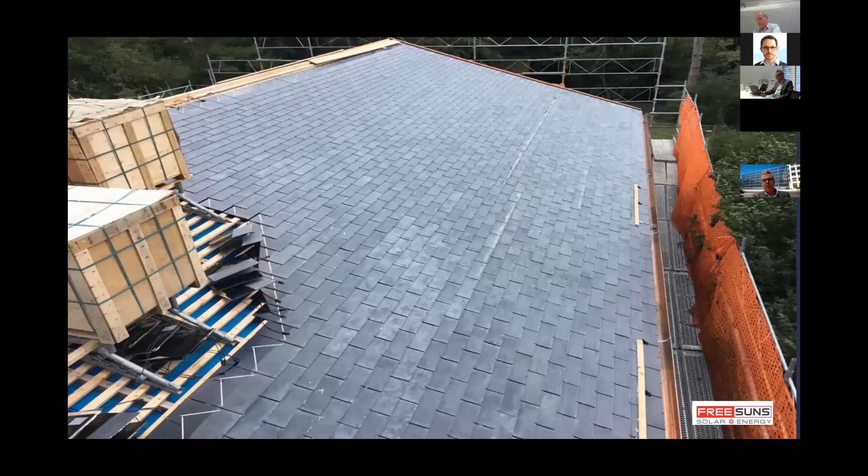I will not tell you whose roof this is. But you can do a lot of such roofs, and we have the society Freesuns developing beautiful solutions where you really have, such as here, this 3-cell solar module. This is the same here with sandblasting. So you can start to have beautiful possibilities.

And this is the last project that John Morello did. It's completely crazy. These are modules where each tile has 3 colors. And this is really a photovoltaic module here. It's art. This is art.

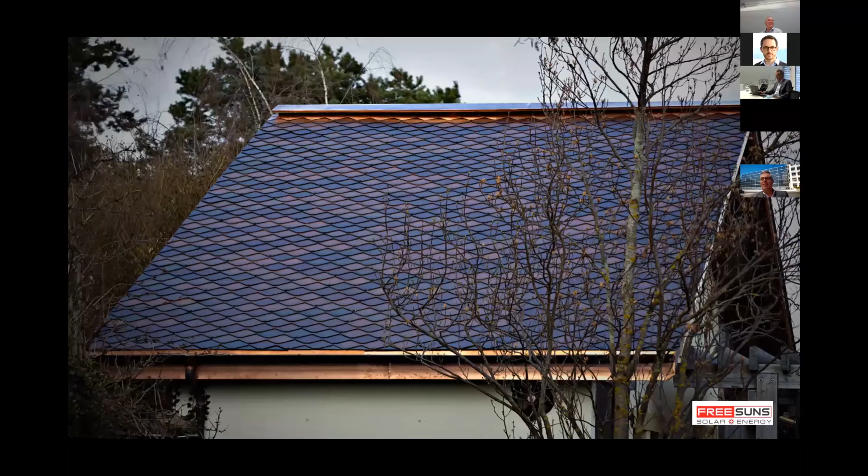Yeah, okay, so it's of course a little more expensive. But a few years ago we showed that you can also combine photovoltaics with high quality images, and we've done a lot of beautiful projects sponsored by the local bank. These were all photovoltaics, 2 by 2 square meter modules, and you will see more and more of these photovoltaic images at the lake of Neuchâtel.

You can see this is all photovoltaic and it produces electricity. We stay here for years. Exhibitions all around the world. Private people buying photovoltaic pictures and generating kilowatt hours.

This is the end of a garden here. You can make a few thousand kilowatt hours per year with these beautiful integrated walls. And there was even a beautiful exhibition that I hope many of the EPFL students could visit at the EPFL pavilion. Okay, so with that, I'm coming to the end of my presentation.

I hope I could show you why photovoltaics is really something that will help for world decarbonization. It is necessary; there are not so many other options. We need much more of that. We need to use every available roof. We need to further develop the technology to make them better, cheaper, to facilitate this energy transition. There are local jobs in research, in installation, and in engineering. And of course, every architect, every citizen should take part in this process by actively developing, promoting, and not blocking it.

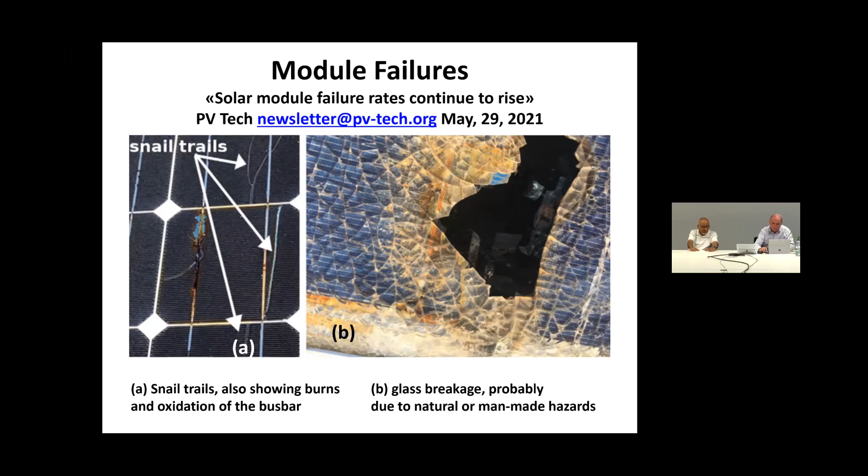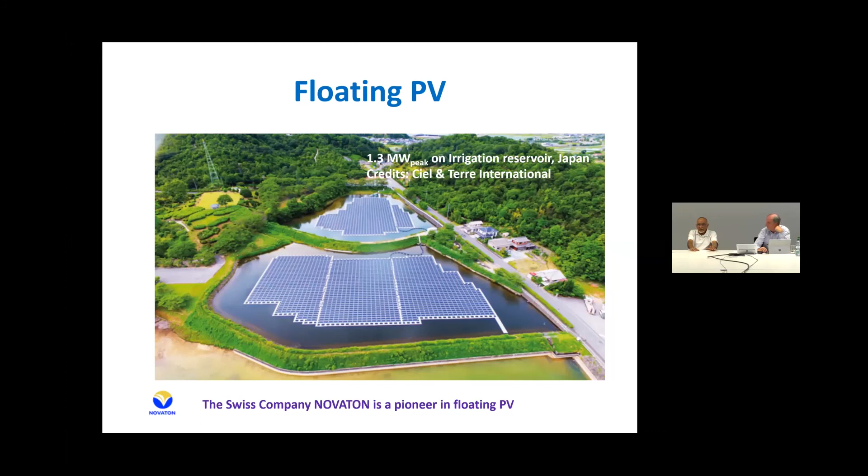Floating PV - we've talked about PV on roofs and PV on the land. I think floating PV is important because it saves space. This is an example from Japan, from Ciel & Terre International, on an irrigation reservoir. Incidentally, the Swiss company Novaton is a pioneer in the field of floating PV. Mark that name, please. Next slide.

So I come to the last slide. I spent a large part of my professional life trying to understand amorphous silicon, and it was a very difficult task. It's a complicated material - I think I still don't understand it, and maybe nobody understands it. So thank you very much for the attention.